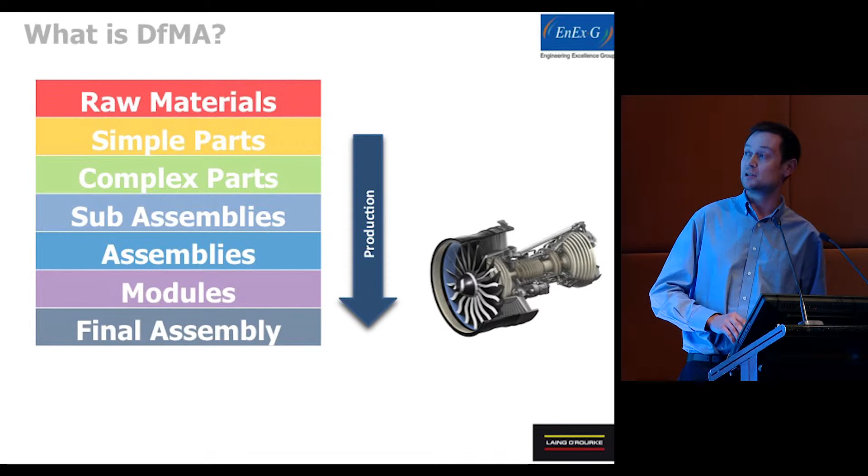And also, one person's final assembly in manufacturing might be another person's part. So the jet engine is the final product for Rolls-Royce, but it's only one part for Airbus. So that's a fractal, because that's got the same sort of recursive geometry. So here's Airbus. This is their final assembly plant in France, where they're putting together an A380 aircraft. And many of those large modules have come from separate factories all over Europe.

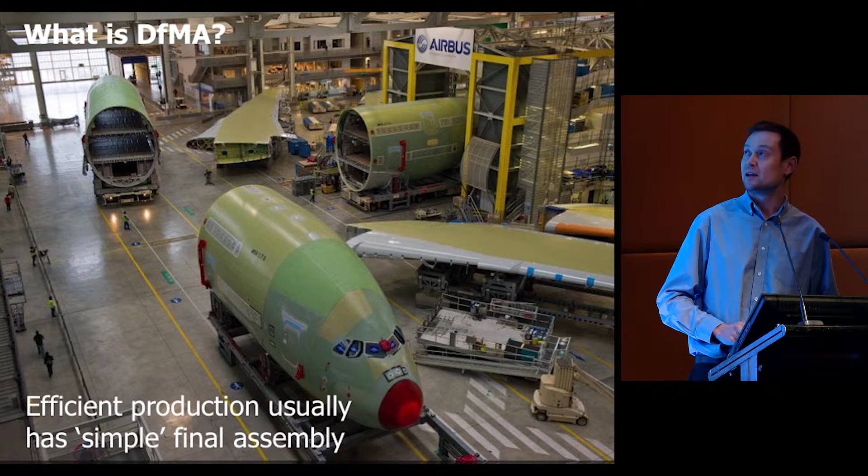And that's the way that they've managed to sort of improve their process. And it's the same thing that's reflected in the shipbuilding and in the automotive industries. So what they've all got in common is that the final assembly is usually quite a simple process. Every production line is quite simple, rather than trying to do everything on one production line in one place. So what we're saying is, can't our construction site be like a final assembly factory? And we do all the hard work in other factories.

And we've tried to implement this on the Leadenhall building, and it's generated some interesting statistics. I think we cut our on-site labour by 40%, and we also were able to offer the client a programme saving of 38 weeks on site. Obviously, in the centre of London, anything that you can do to reduce the amount of work that's happening in your urban environment is quite important.

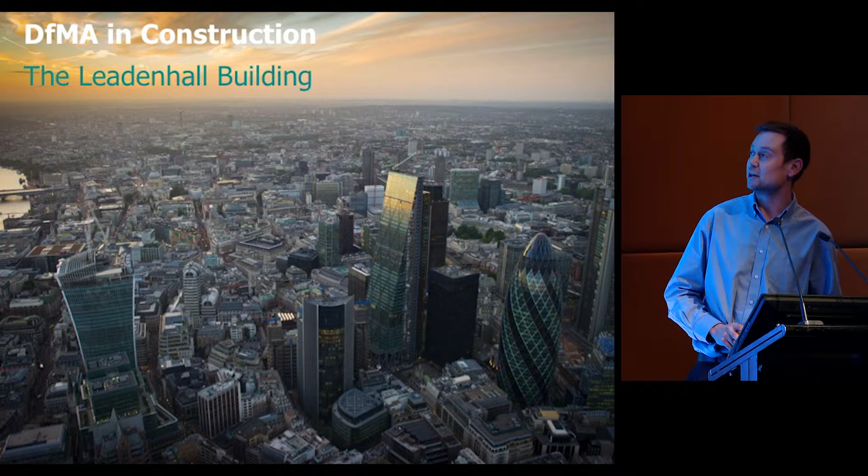And actually, before I arrived at the conference, I thought the Leadenhall building was quite a tall building, and it's actually down here on the wall. It's only small, but it's an essay in steel fabrication and a celebration of engineering. There's no concrete core; it's all steel megaframe structure.

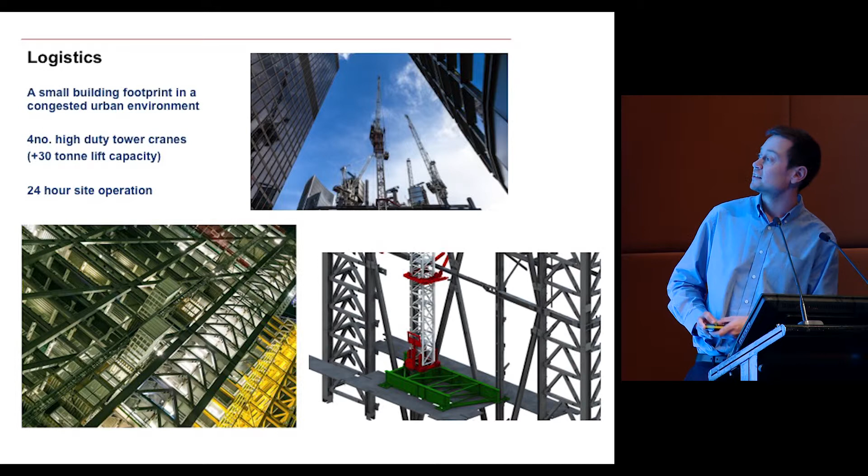So two prerequisites for a DfMA approach. One is logistical. You're obviously going to be handling some bigger than normal components, so you need to get the biggest cranes you can lay your hands on. And the other thing you need is a really well-functioning digital model. We call that digital engineering, and it's not just that we use it as a design tool to detect clashes and so on. It's actually used as a manufacturing tool to control manufacturing processes and also to control logistics and identifying components and so on. So there's a snapshot from our digital model in the bottom right and a couple of photos.

So our steelwork, again, we try to deliver that in as big pieces as we can. It's all made in a factory. There's no site welding. Components are bolted together on site. Even though we made the pieces as big as we could, there were still more than 11,000 of them. Columns up to 26 metres long, weighing 60 tonnes. And obviously all the workmanship is in the connections, in the nodes.

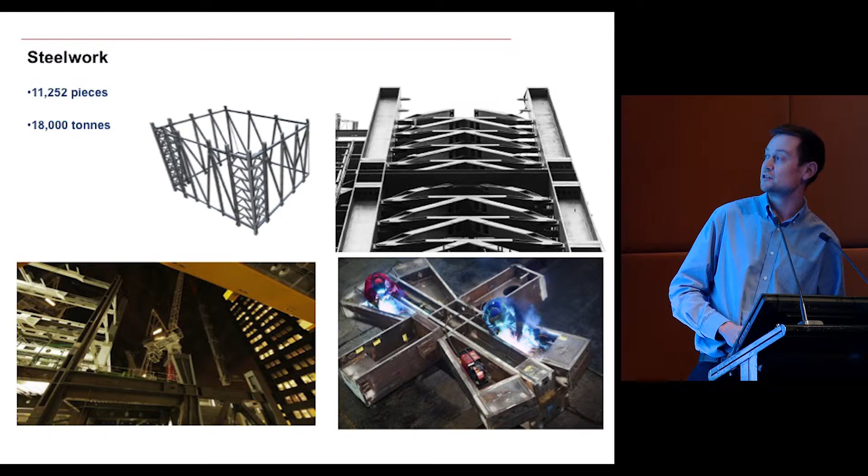Another nice picture of the construction, a node being lifted. And on the left, again, an image from our digital engineering model showing how it's used to plan construction. So the elements highlighted in colour are the elements to be erected in a particular shift, and the digital engineering model is used to model the construction process in the virtual world, so you can test out different orders, sequences, and so on.

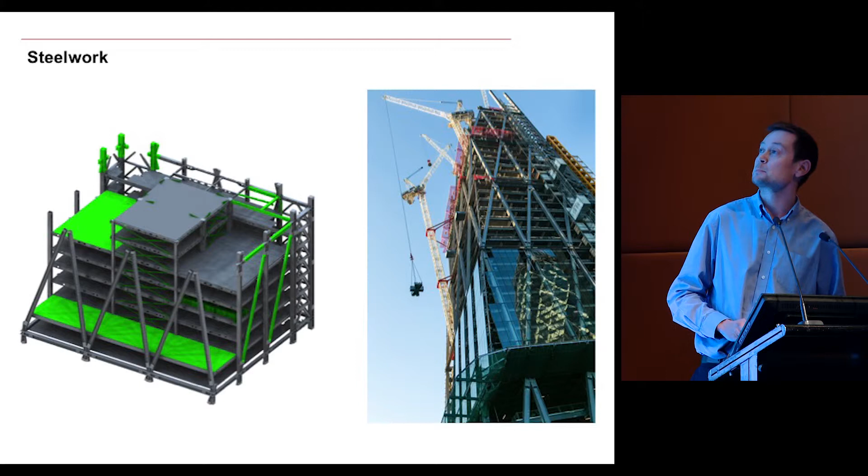Concrete also, as I said, it's mainly a steel frame building, but obviously the floors are concrete, and there are also some stair cores that are concrete. Adopting the DfMA approach means that we don't bring wet concrete to site. We bring precast concrete, highly engineered, individually made precast elements that are the right shape, have the right fittings to marry with the steel frame.

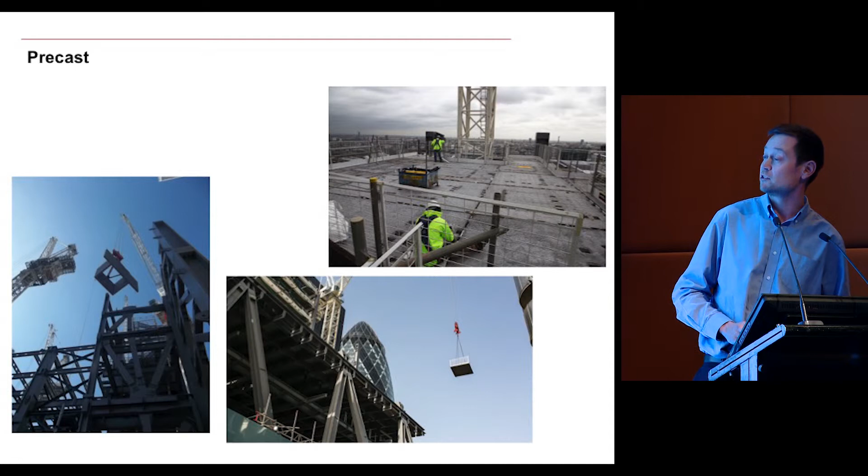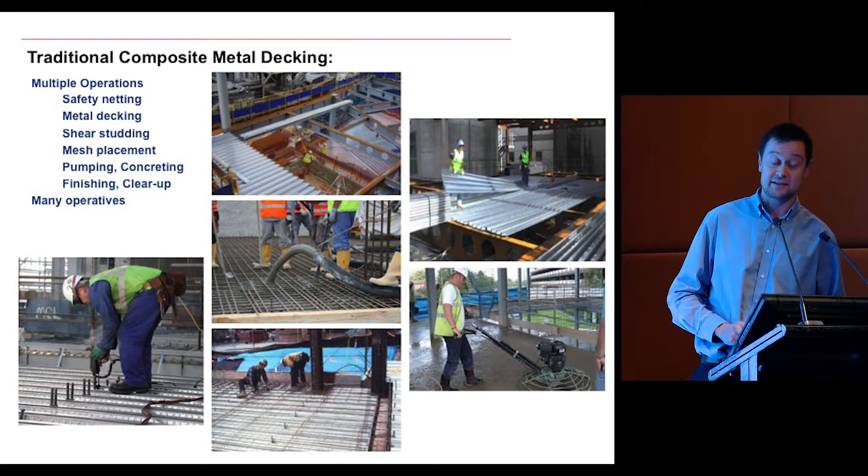So here's some more images. I think the next few slides are about our floor system. It's a precast floor system. It forms composite beam design, so it needs to be stitched together and also have a shear connection to the steel beam. But you can see there's very few operatives on site.

Panels are just lifted in. They've got their edge protection prefixed. The floor can support a cherry picker, bottom right, immediately. You don't have to wait for the concrete to cure before you can start loading the floor.

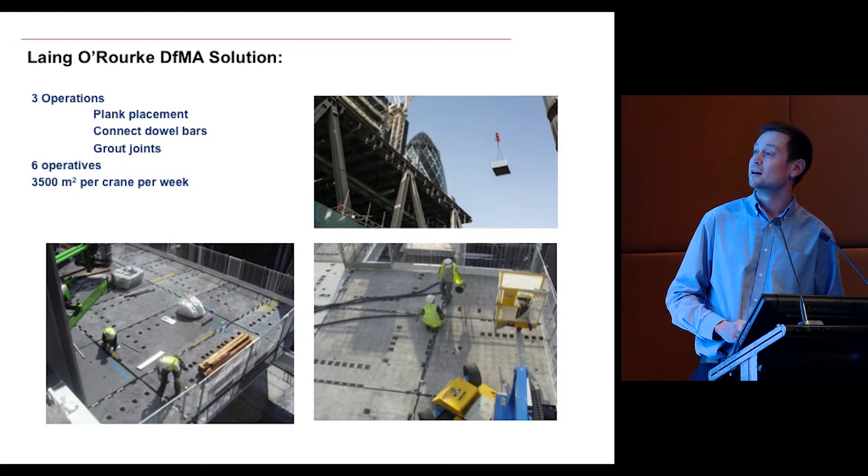So in detail, the plank is a fairly traditional rebar cage. It has some dowel bars that were connected through tabs on the top flange of the steelwork. And again, the digital engineering model was essential in order that when we landed the planks on site, the dowels went through the right holes in the steelwork, because trying to do that without the model would have been impossible.

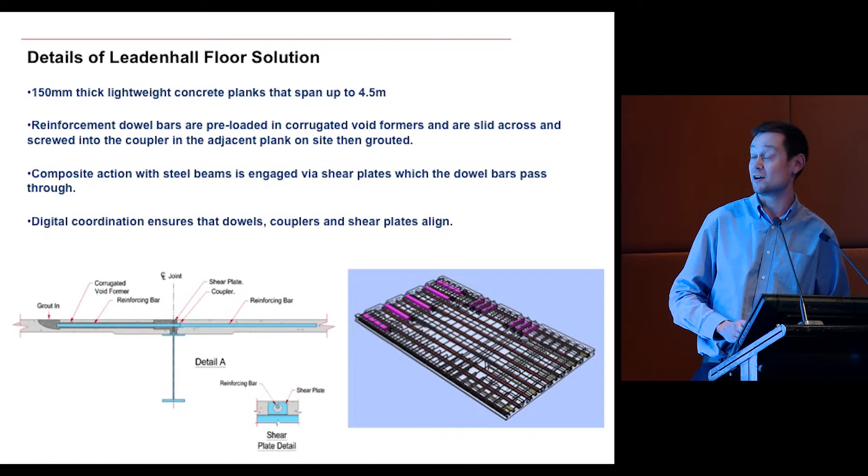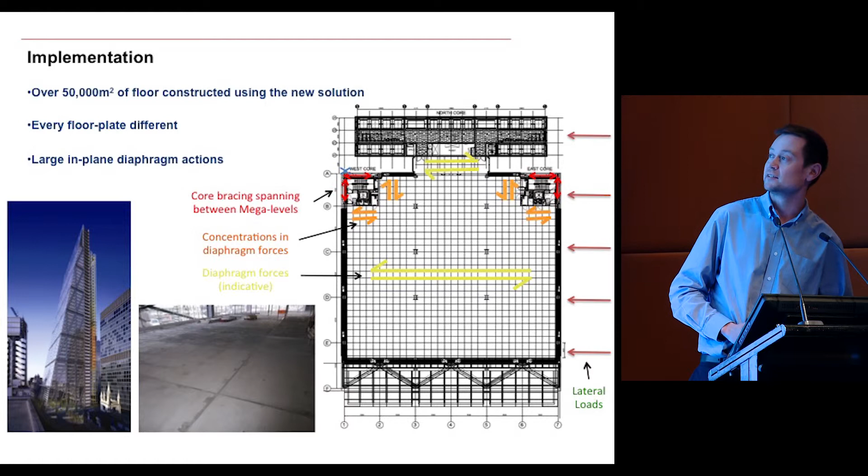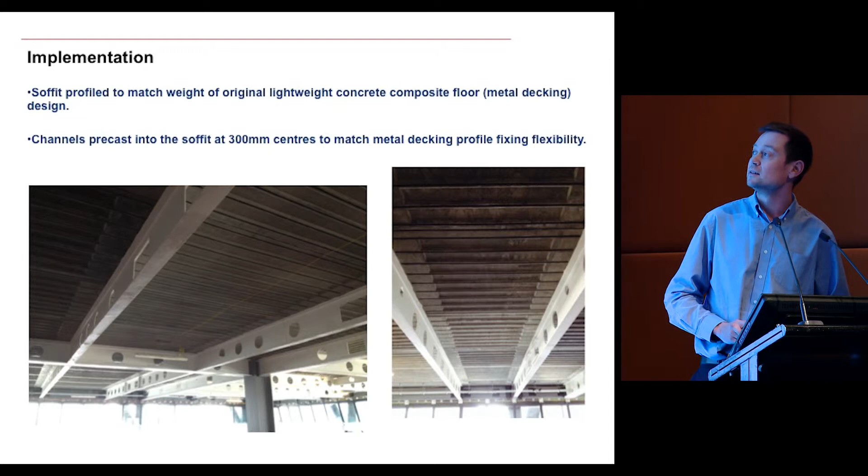Just some more slides. This one's just highlighting that the floor plate obviously is more than a gravity load carrying element. It's forming the diaphragm in the building, and any building with a mega frame has particularly intense diaphragm forces at the mega levels. So we had to cater for those. Some images from underneath, precast soffit with cast-in channels, because we were trying to mimic the flexibility that a metal deck gives you. And of course, to implement this product, we had to go through the appropriate testing and approvals process.

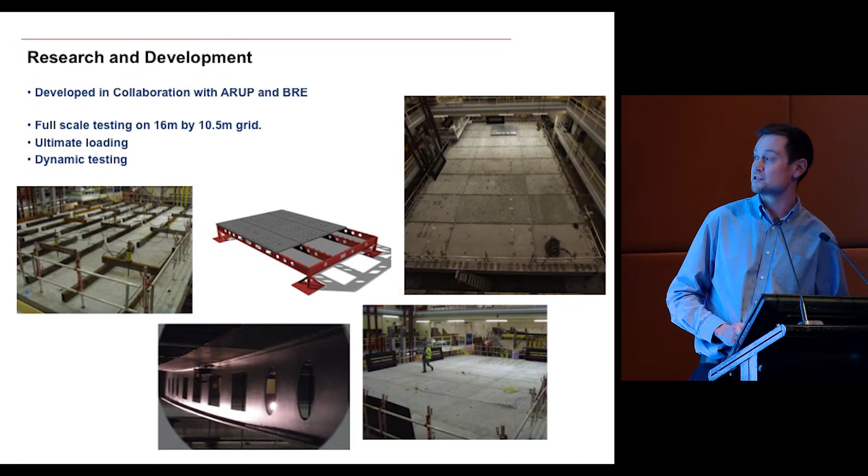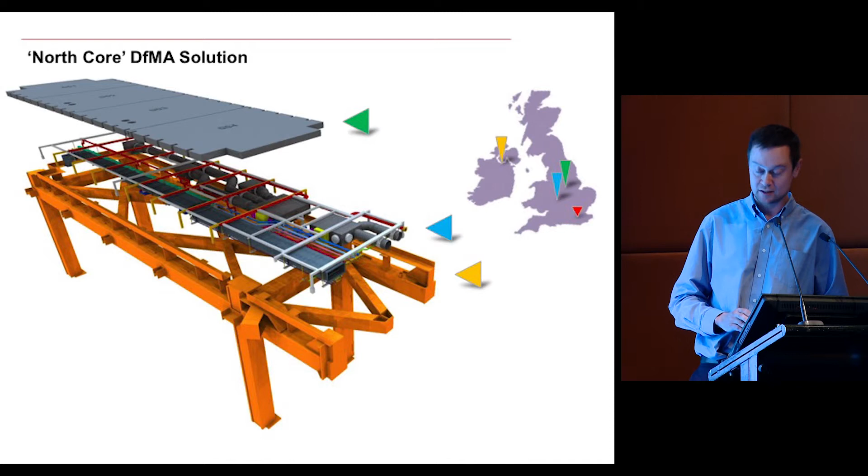So each level of the North Core was made of 3 components, and the next picture shows an exploded view of one of those components. So the component was the yellow steel frame, which is the columns and the beams and the bracing, onto which we landed a separate M&E module, and then on top of that we landed precast concrete planks. So each one of those sub-assemblies was made in a different factory in the UK. They were brought together to form one module, and then transported into London on one wagon.

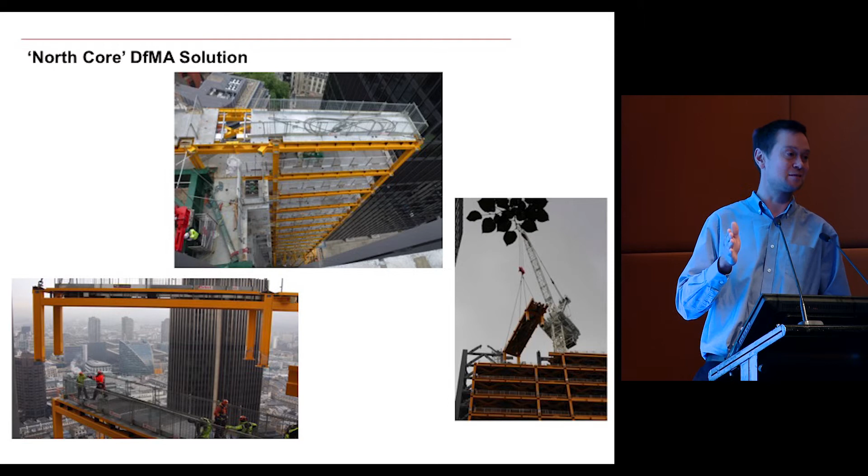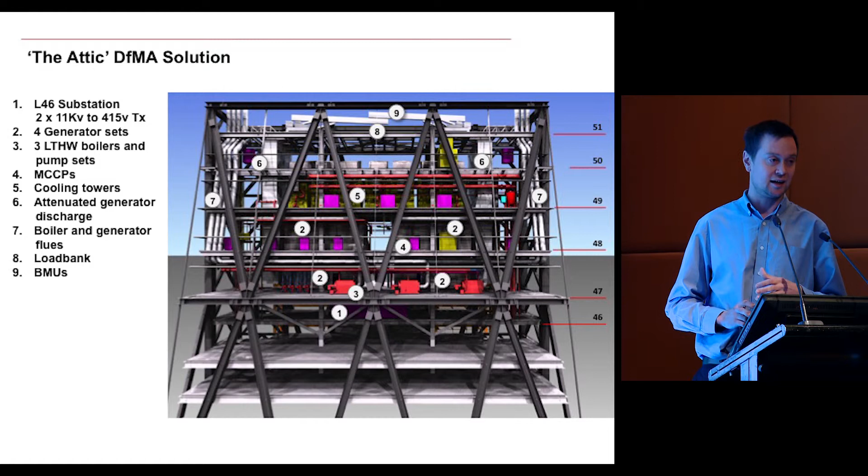Another example was at the very top of the building. Obviously, the building leans as it gets towards the top in order to preserve the view of St Paul's Cathedral. So they decided to put the plant rooms all in the roof of the building. And again, we wanted to use our digital model in order to squeeze the plant rooms in as efficiently as possible and maximise the available space for the client. But we also had to plan how these modules could be shoehorned into the building and moved around.

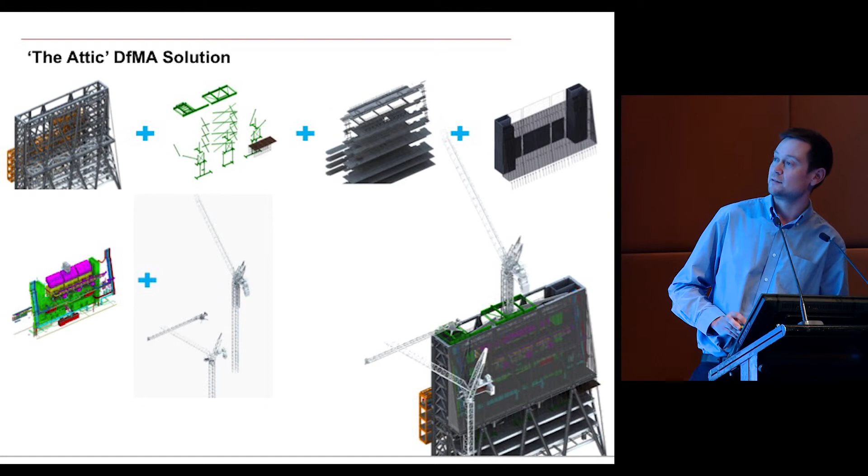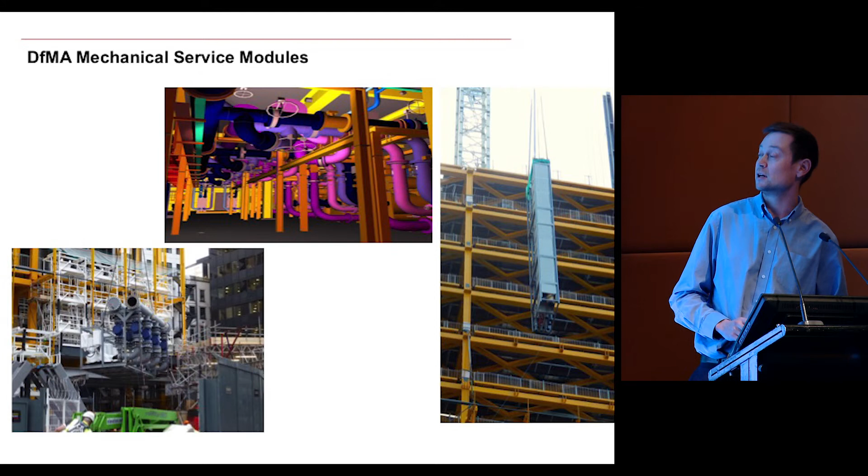So looking at the DfMA approach, the total building is a sum of several systems: the steel frame, the concrete planks, the facade and the MEP. Bottom left you can see one of our MEP modules being lifted up to the roof. Top in the middle is the digital engineering model of the MEP, and then on the right hand side it's a vertical MEP module for vertical risers and so on.

And then just finally a word on the facade. Because we were using our cranes so intensively to lift steelwork and precast components, we wanted our facade to be installable without relying on the cranes. So we developed a special materials handling system that could climb up the outside of the building, and we could pass it the glazing units, and it could trolley those around on the outside for installation.

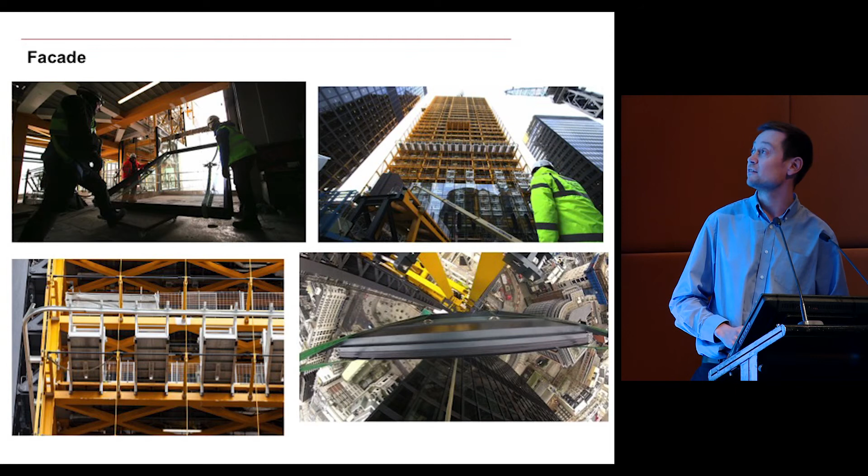So in summary, the Leadenhall building has been, I think, to date, Laing O'Rourke's most deliberate attempt at DfMA. We've realised real benefits from doing it, and we hope to carry on changing the way we build things in the future.